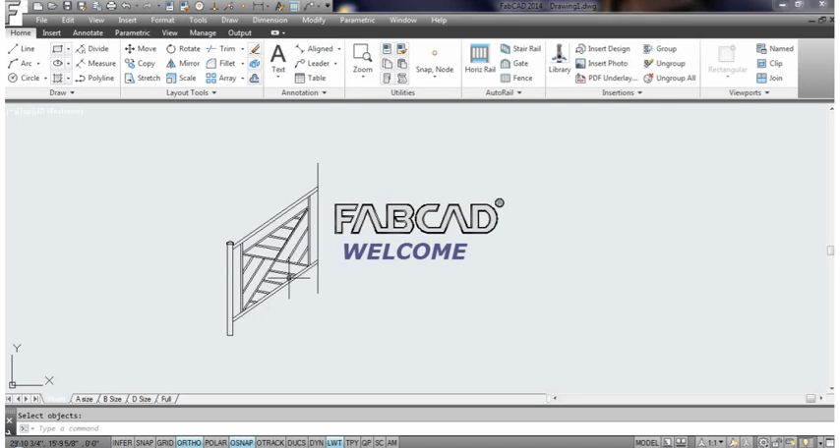Hi, this is Dave Philippi with FabCAD, and today we're going to go over how to draw a Chippendale railing. So I thought I would show you a picture of where we're going to be going with this. And this style is very popular on the East Coast and we're seeing a lot of evidence of it gaining popularity in other parts of the country.

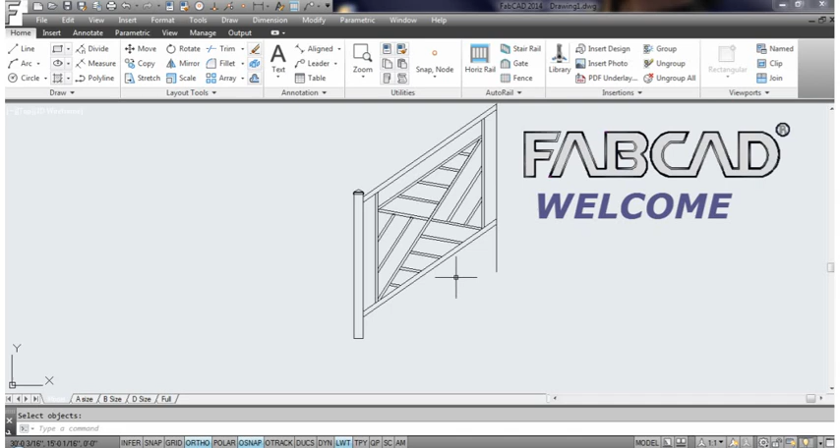And one of the problems with it is just making sure that the spacing of these members are all the same and just getting them on the screen. It's a tedious job if you draw everything individually. So we're going to show you some layout tools, show you how you can do a double mirror command to just draw half of it to get the design that you want. And we're going to do a stair rail because that's harder to do than doing a level rail, which is easy to mirror.

So first thing we're going to do is draw a basic railing. So I'm going to use the stair rail program to do that. So I'll click that and I'm going to import a template, and I created one. It's called Chip Rail. So I'll click OK. And I've got my parameters all set here. It's just a small interior Chippendale rail, a few steps, 5 steps, whatever it is.

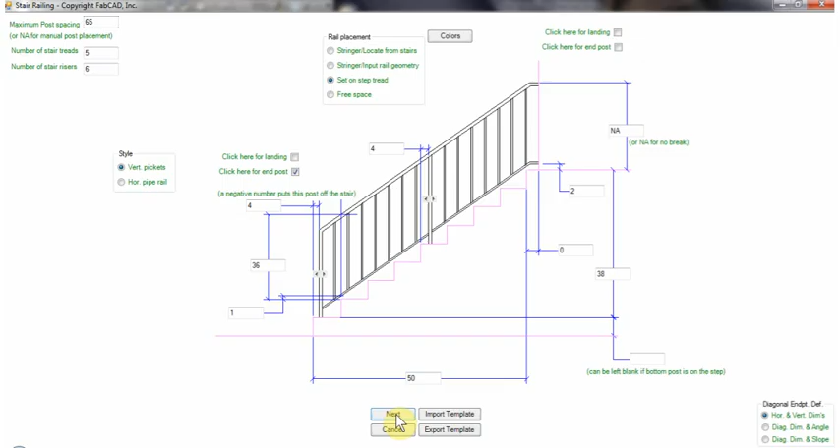And I draw next. And it's going to be a 1x3 top bar, 3-inch square tube, 1-inch square tube, and give it a wood look type appeal. And then I'm going to use default from my ball cap and then draw the railing. And there's the layout of the rail. Now, we're only going to use parts of this. So I'm just going to erase pickets. We don't need that dimension there, because we're going to put a pattern inside here, and I'm going to erase that dimension there.

And then I'm going to offset the top line down 4 inches. So I'll use offset, and I'll type in 4. So I will select the object to offset, which is this top bar here. Make that 4 inches. And then I'm going to offset again, and I'm going to do 1.5 to make it the same thickness as the top bar. Now, if you don't have 1 1/2 inch tubing, then you can offset that 1 inch.

Whatever works for you. Just make sure whatever you do, when you show this to the customer, you do exactly what you've drawn, because one advantage of CAD obviously is you can show the customer exactly what it's going to look like, but you better make sure you deliver exactly what you drew. Okay, so we'll trim this off here. And then we'll draw the basis of the frame. So I'm going to draw a line from there to there, and a line from there to there.

Okay? Now the body of this design is going to be 1 inch. So when I go to offset, I'm going to offset on either side of the center line. So the offset distance would be 0.5, which will give me a 1 inch member. So I'll go from here and offset down, and go from here and offset up. You notice with the offset command with the newer versions, it previews where that offset line goes. There and there.

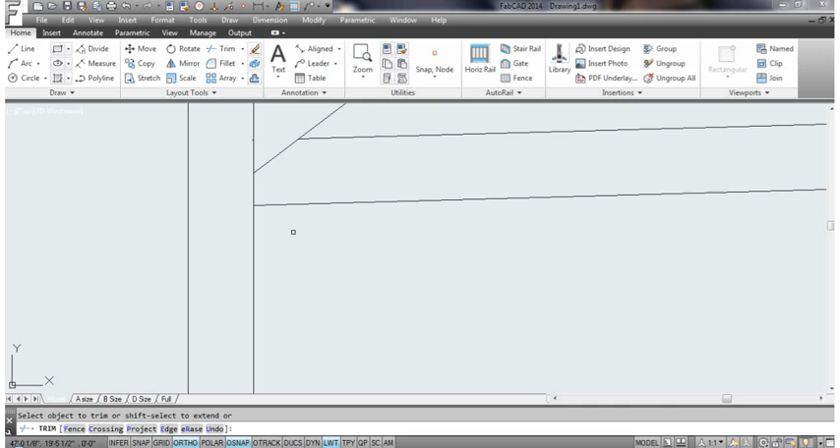Okay, the next thing we need to do is we want to evenly space out the members from this point down to this point down here. Let me first trim off, right click, trim off these members here. There, zoom in. That's an extend. I hold the shift key down and that goes to extend, and that extends that. Go up here and trim this. Trim this. I don't know if that's extended. I hold the shift key down and hit it. Yeah, okay. Can barely see it, but anyway.

Now, we want to evenly space patterns this direction here. To do that, I'm going to draw a reference line from this point to this point. Now, when you lay out a picket railing, if you're using the divide and measure command, if you want the end gap and the center gaps to be the same, you have to extend that line that you're going to measure and divide by half the distance of whatever the picket is. So in this one, we're using 1 inch members. This mark here is halfway, so that gets me a 1/2 inch extension on that end.

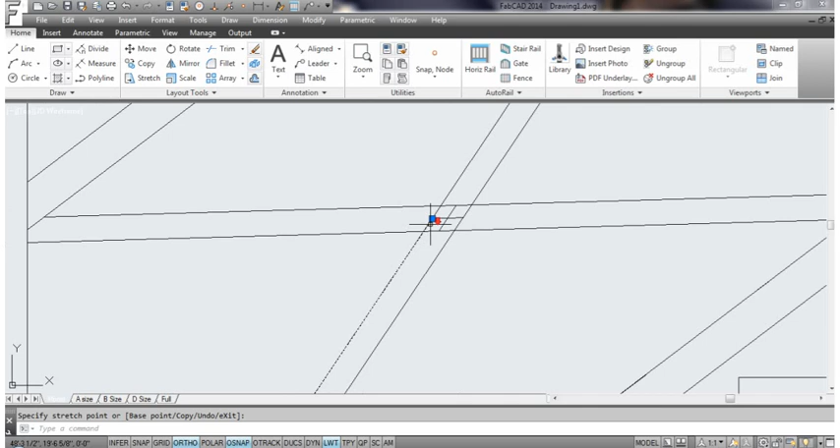To extend this end here, I click on the grip, and I'll take off ortho here, and I'll move in the direction I want to go. And I'm just going to type 0.5, and that makes that a 1/2 inch longer. That way, the end gaps and the center gaps will be the same.

Now, the code is 4 inches, so I want to see how many pickets I need to meet that code. I'm going to use the measure command, and it says specify length of segment. I want to say 5, because center to center with a 1-inch picket, I need to have at least a 4-inch gap.

So hit 5 and enter. So it's marking off 5 inches here up this line. And it tells me I've got 1, 2, 3, 4, 5. I need 5 pickets, 5 of these members to meet the code. So I'm going to erase these nodes here because I'm going to now divide it.

So to get 5 nodes on the divide command, I need to divide the line into 6 segments to get 5 nodes. So I divide this and put in 6 and enter. Now I got 5 nodes, but these are all evenly spaced. These are not hatched out at 5-inch increments. All right, so now I'm ready to copy this piece here down and create my first part of this pattern.

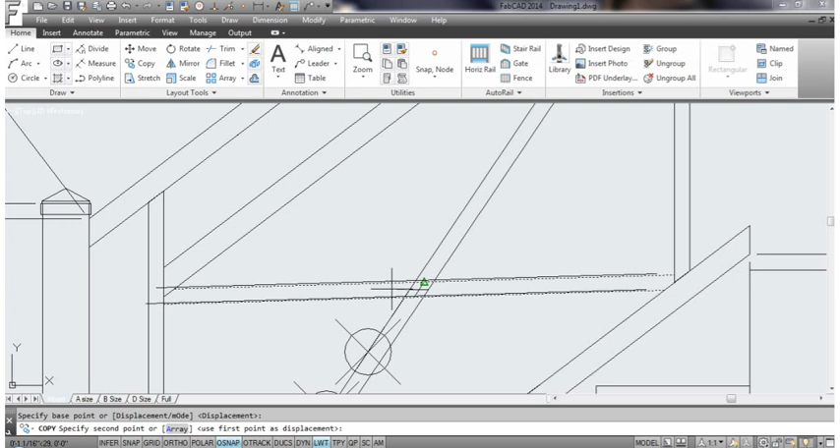So I'm going to go to the copy command, and we'll pick this line here. And the base point I'm going to use is this point here. I'm going to use the array option, and it's asking me for the number of items in the array, and that's going to be, if you count the other piece, it'll be 6. And as I move out here, you can see I'm going to go up here and snap to node, and boom, there it is.

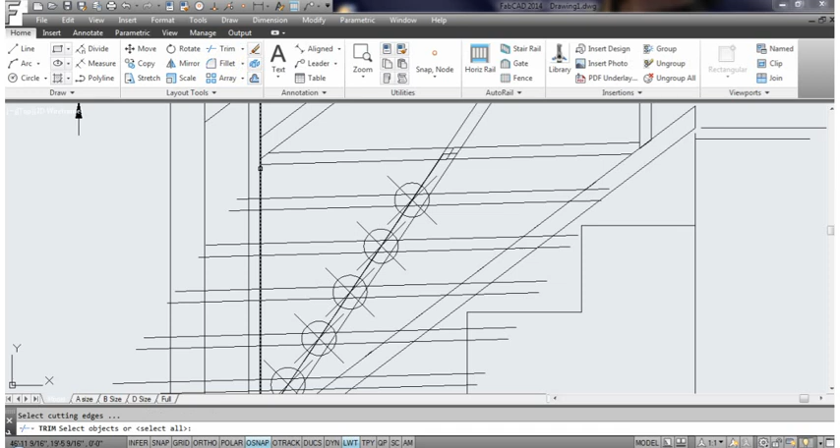Okay, now the next thing I need to do is trim off these pieces. So I'm going to hit trim, and I'm going to use this as a cutting edge, and this is a cutting edge. And then I'm going to go in and trim all those, and make sure I trim the right ones now. Okay, then I erase these nodes. Oops, didn't want to erase that. Erase.

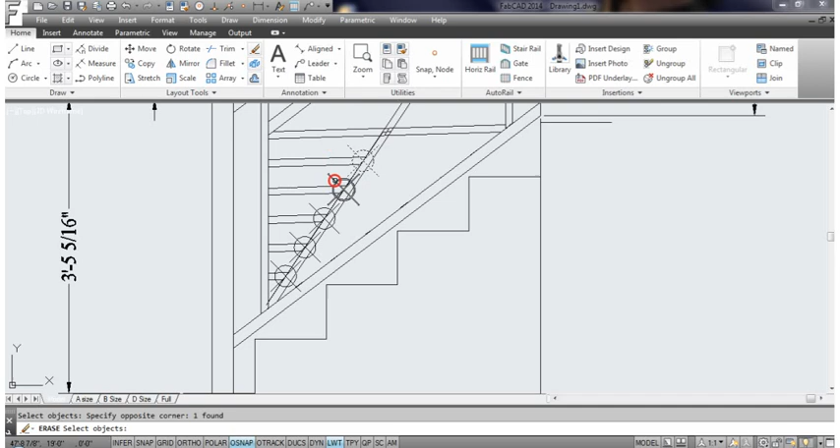Okay, I've got 1/4 of this railing drawn. Next thing I need to do is do the same thing along this member here and copy these pieces across to create half of the Chippendale pattern. So I'll start again with a line. I'm going to draw a line from here to there. And then I'm going to extend this line. Well, I got a reference point for this one to that end point there, and I'm going to extend this one a 1/2 inch this way, 0.5.

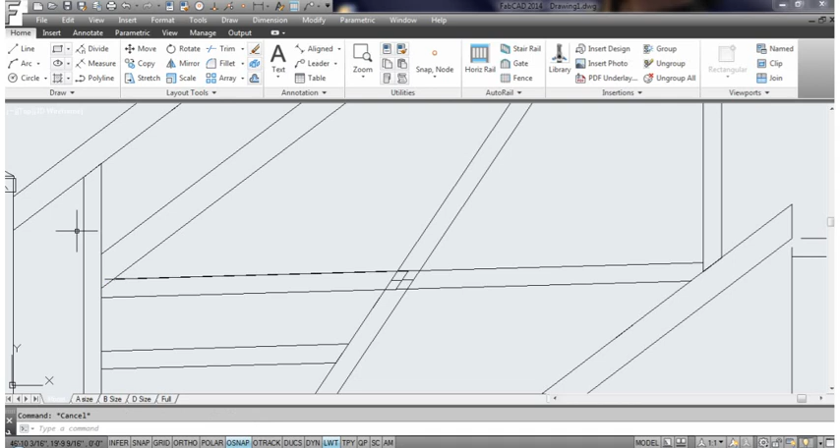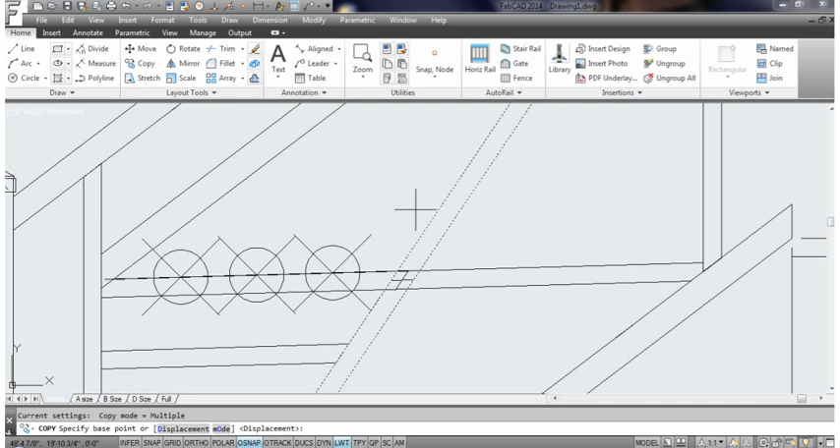Then I'm going to measure it again, 5 inches on center. So I need 3 members on this length. So I'm going to erase this and divide it into 4 segments to give me 3 nodes. Then I'm going to copy this piece, and I'm going to use my base point here, end point, and I'm just going to snap to these nodes. There's only 3 of them, so just keep it simple. Node there, there, and node there. Okay.

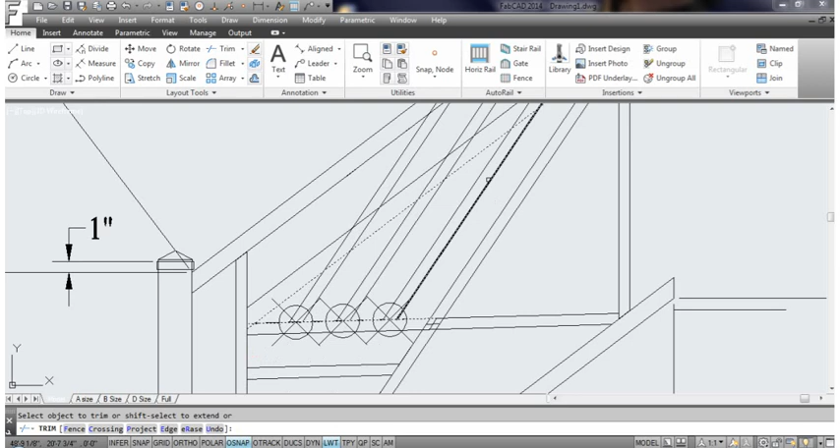Then I'll trim this off. So I'll go trim, and I want to trim from here and trim to this point here. So I'm going to cross through all of those and then go up here and get this, this. Okay, and somehow I forgot to trim this off. Let me go to trim and right click. I'm just going to trim the nearest line here. There, okay. So now I have half of this railing drawn.

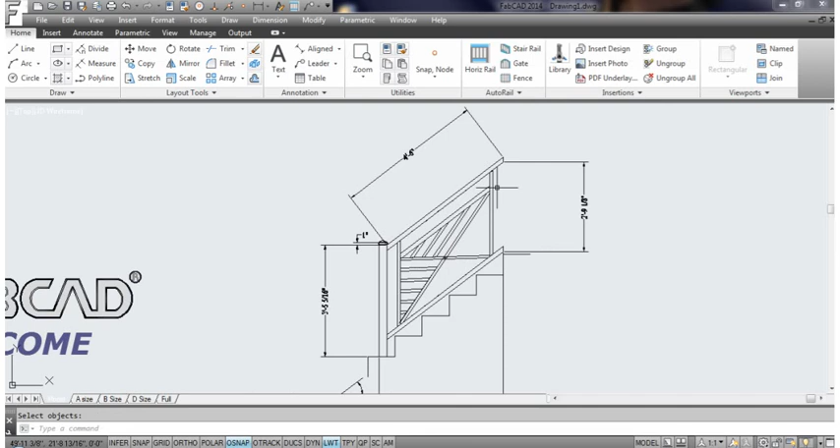Now I could go through and draw a lot of lines and measure and divide and do all that kind of stuff, but I'm just going to mirror it. But when I went to mirror this, I noticed that one mirror wasn't enough. I had to mirror it twice. So let me show you what happened there. So let me just put on ortho so I'll mirror it straight. So I'll go to the mirror command, and I'll mirror.

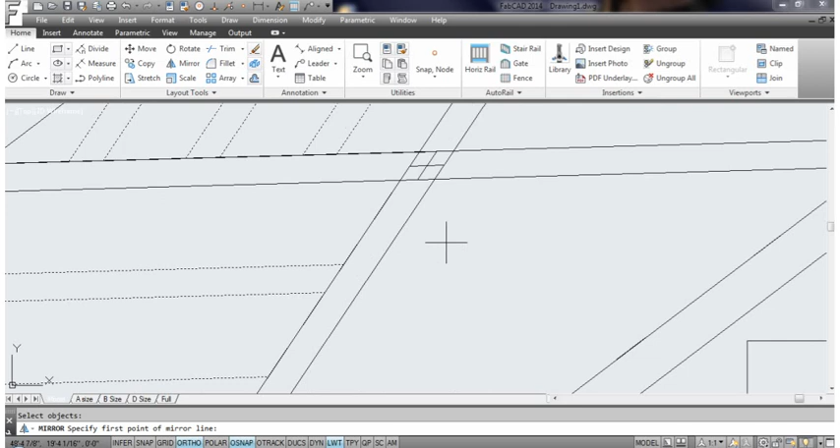You may find that too when you're making scroll designs, that sometimes you have to mirror it twice to get it to where you want. So anyway, mirror. Okay, and the mirror point, another reason for saving this is I've got my center right here. So then I just do one mirror, then I go to mirror again, because I got to mirror it twice, because it doesn't work. I tried 45-degree mirrors and all that, but it didn't work. You have to just do a straight ortho mirror twice, and you'll get it. I'll see you in a second.

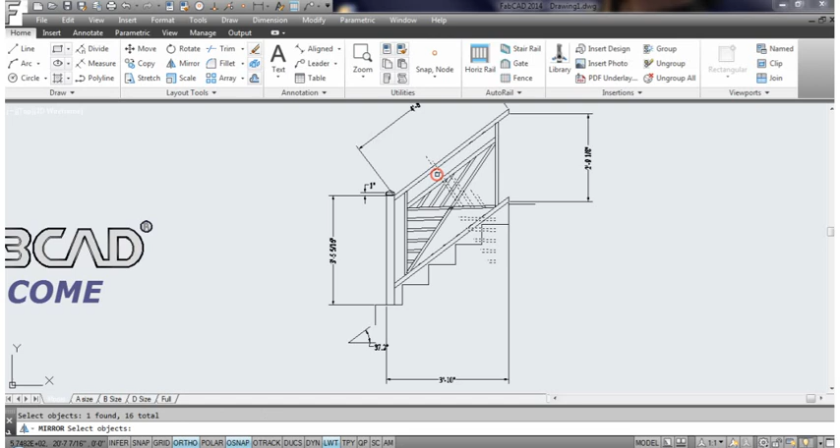And I'll go in here and hit this again, the intersection of midpoint, and then hit mirror twice. Now, at the bottom it says, do you want to erase the source objects? A lot of times we say no. If you're doing a gate or something, you want to keep the other leaf. But here I want to say yes, because I don't want to keep that original. And now I've got my Chippendale rail all set to go. And I've solved a couple of main issues.

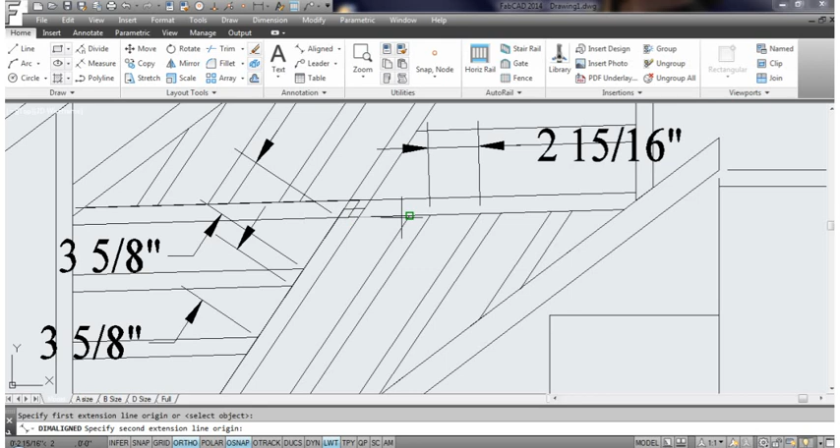Evenly spacing everything. So let's take a look at some of those. Make sure the spacing is right. So we'll start with here to there. It's 3 5/8. Let's try what it's like in the center here. 3 5/8. So it worked out pretty good. Let's try this one. The middle dimension is 2 15/16, and this one here, from here to here, 2 15/16. So the spacing's worked out. We've saved a lot of time by double mirroring, and you've got your Chippendale rail all ready to go.

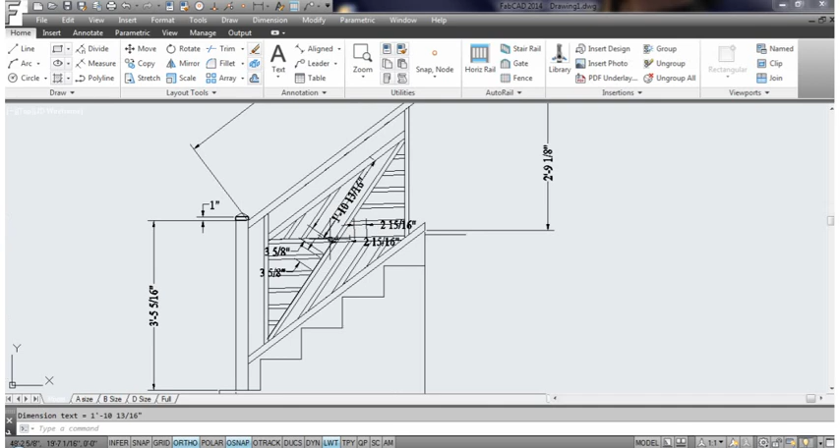And if you cut these things the exact length, you probably don't need to worry about spacing, because once you jam them inside the frame, the spacing should automatically be there. So I hope this helps cut out a lot of the extra steps involved to draw your Chippendale rails. Take care. Bye.